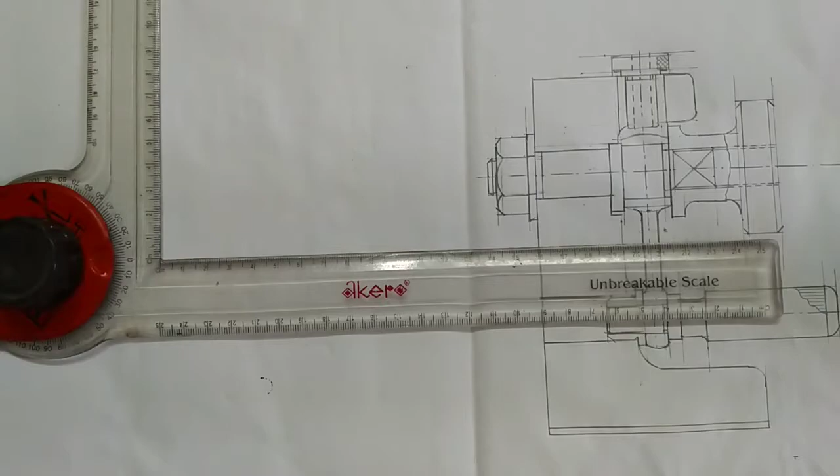Next step, I am going to draw the side view of part number 1 stand.

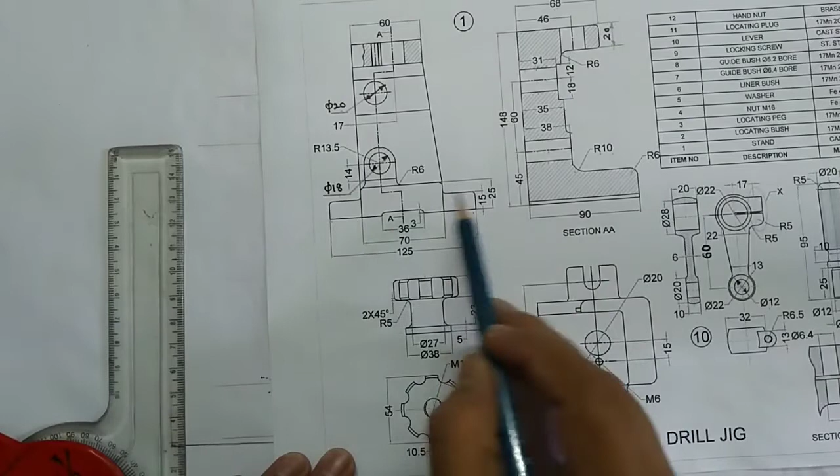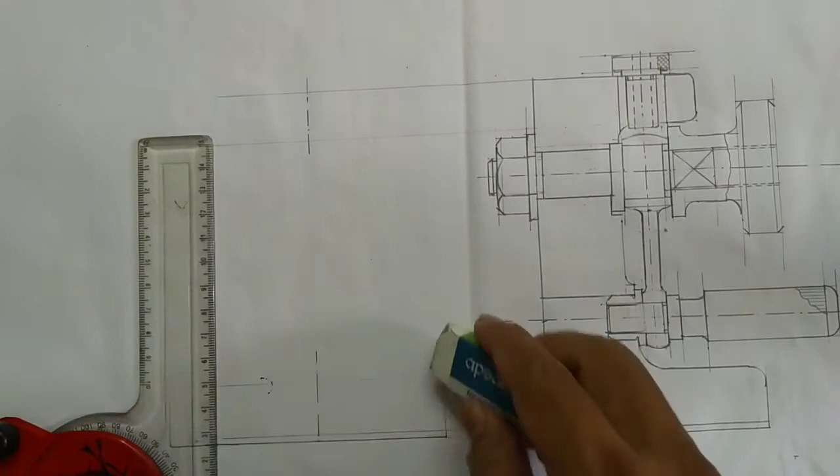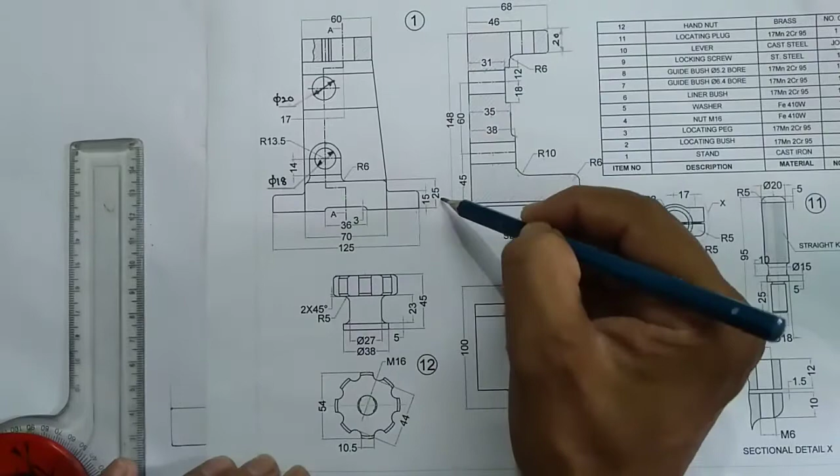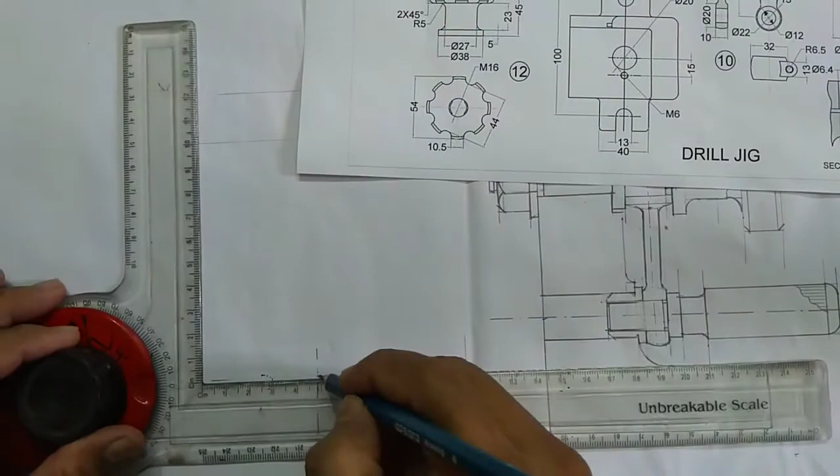Thickness of this flange is 15 mm. A mistake, I have drawn line from 115. I have to draw line from 125 from here. Mark 15 mm from the base. Then this portion thickness was 25 mm. This distance is 70. So I split 35.

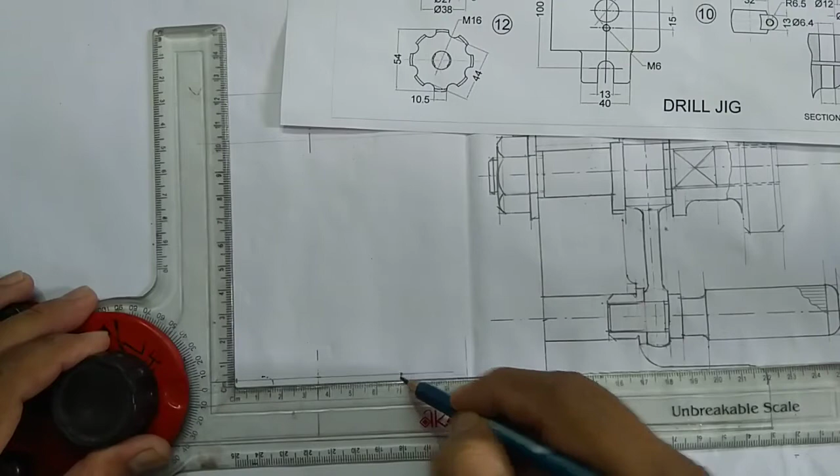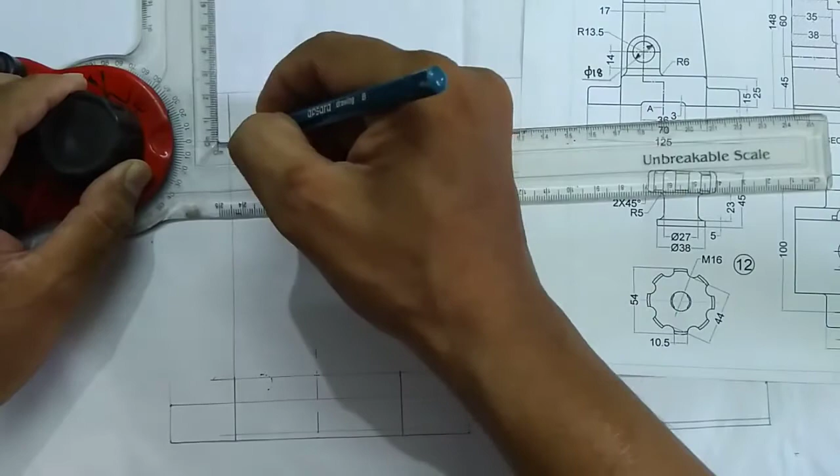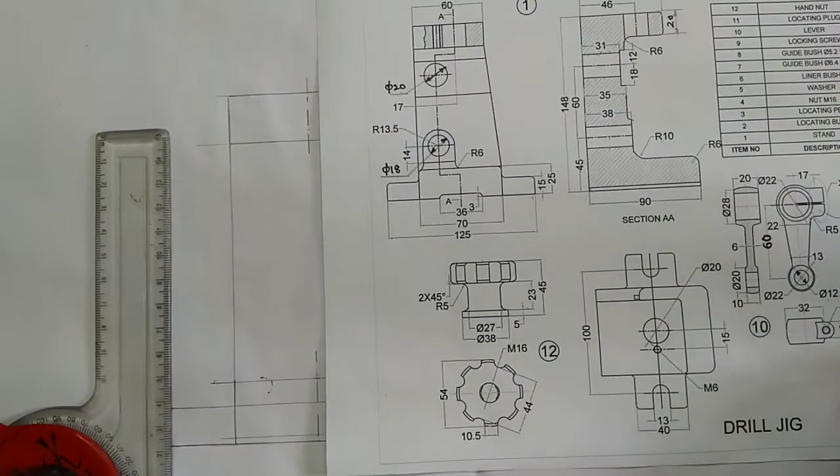Extend the line. This distance was given 60 mm. Then I have to draw this slant line. For that, use ruler and join these 2 points. Next step, we have to draw this center line. This center line has an offset distance of 17 mm.

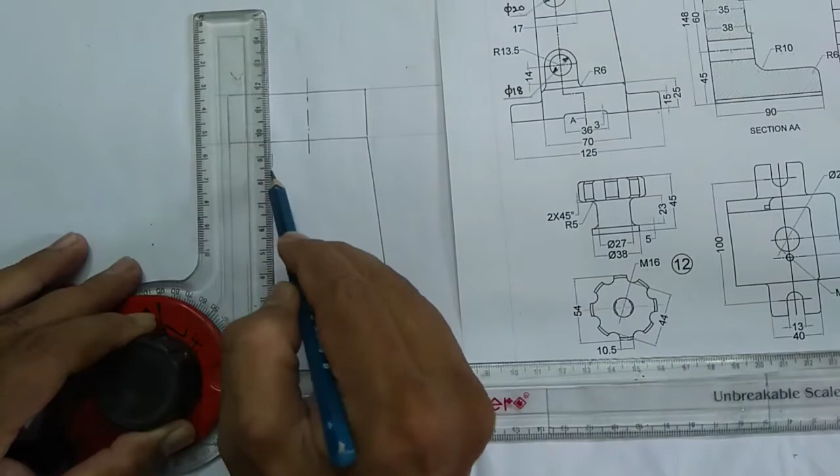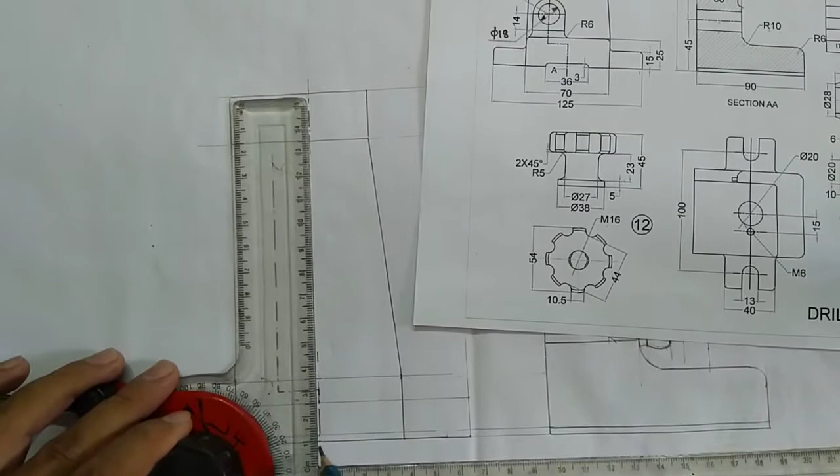So I am measuring 17 mm. I'm marking a point. With that point I'm drawing another center line. Here I am going to use offset section, so I'm bending this section line here. So of that, the offset distance was 17 mm. Next,

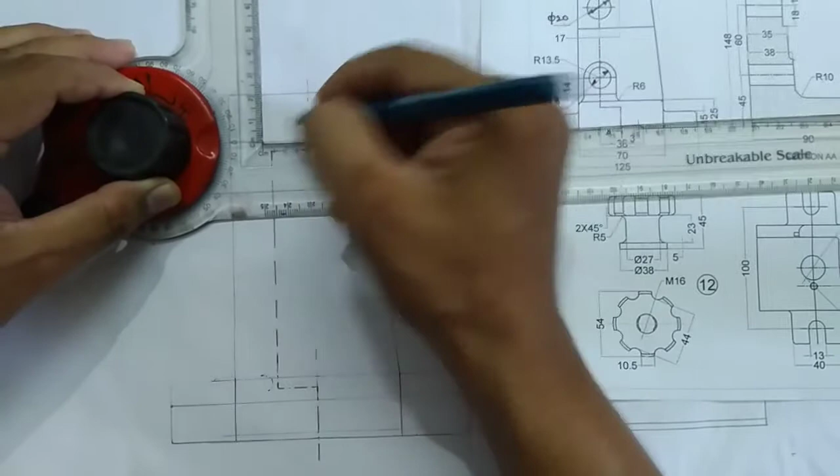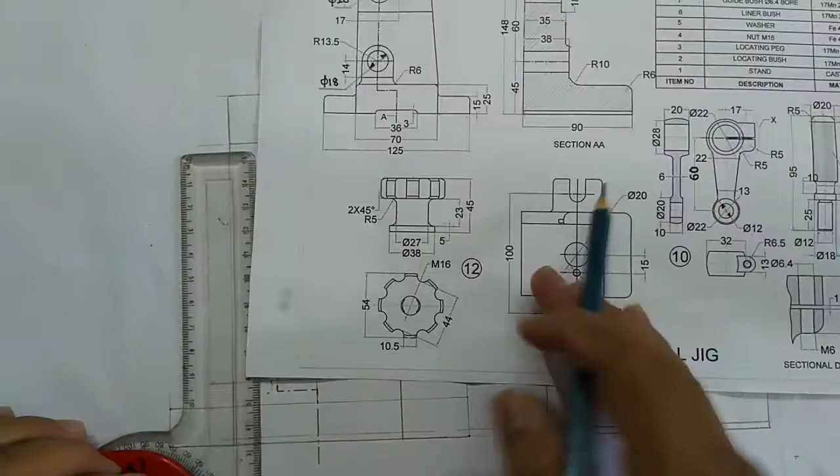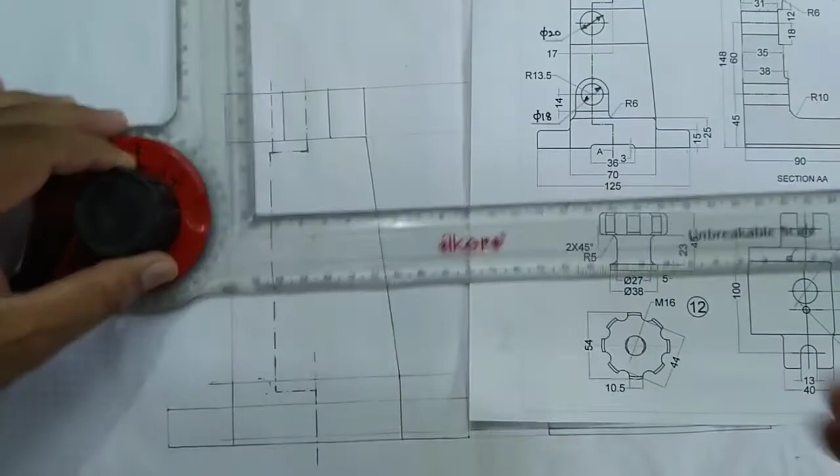There is a hole here. The hole diameter was given on the top view 20 mm. You can see another threaded hole here. That hole diameter was given on the top view M6, and also the distance between these two centers of the hole is 15 mm. So I'm marking 15 mm, 5, 10, 15 here. So M6 means we can split into 3 mm.

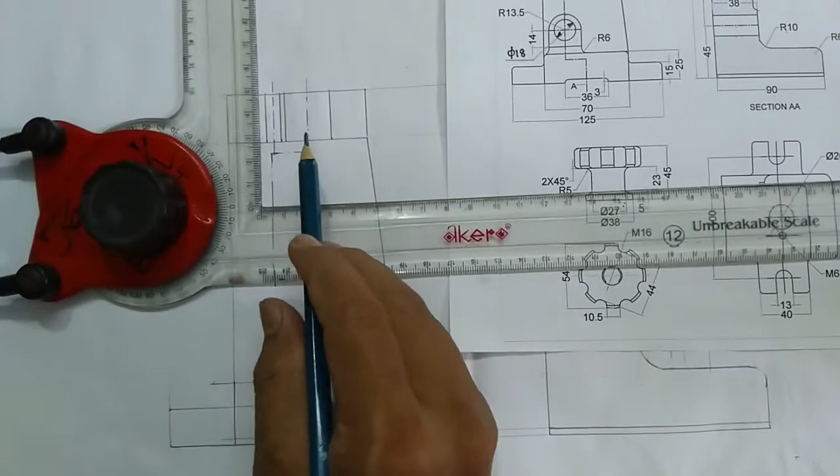As this one is a threaded hole, I have to draw two lines to indicate that this one is a thread. I am leaving just 0.5 mm gap.

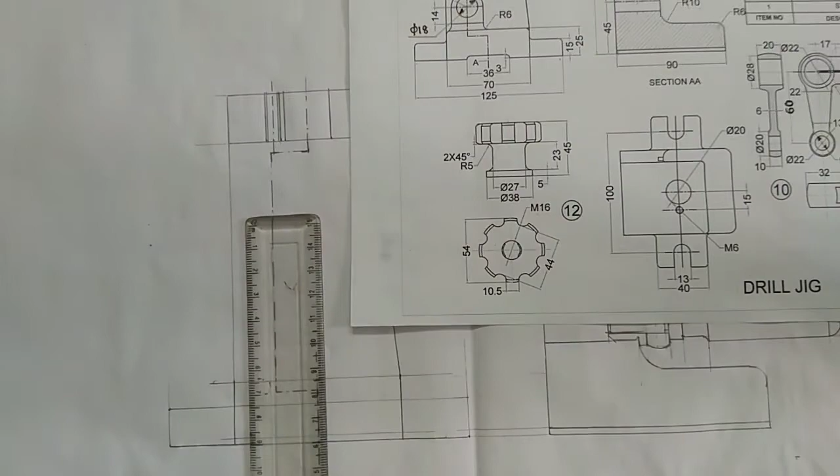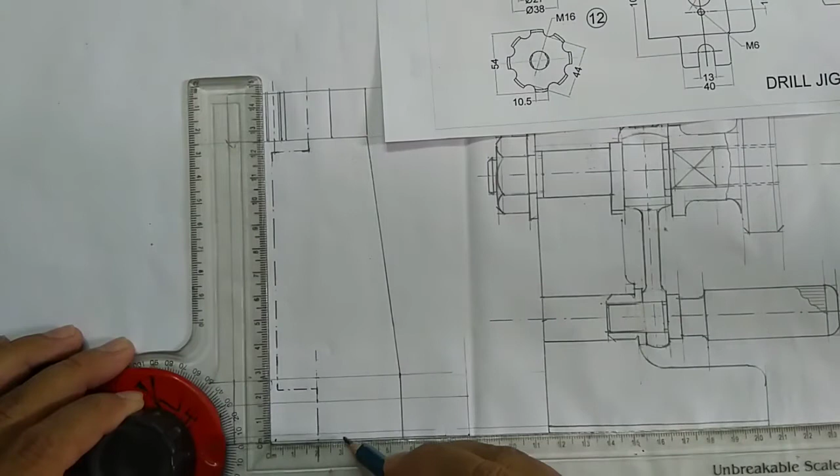Next thing, here you can see a small cut. The height is 3 mm and the width is 36 mm. Half of 36 is 18. 10, 15, 18 and 10, 15, 18. Here the corners are filleted. As this height is 3 mm, use 6 mm diameter hole to fillet the corners.

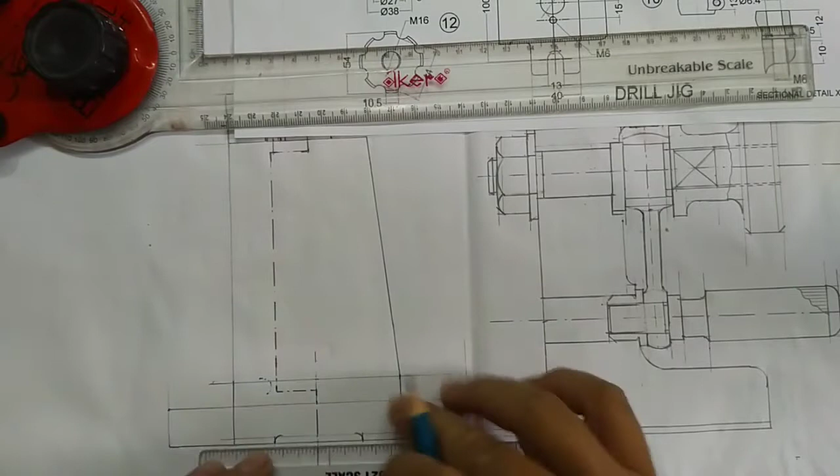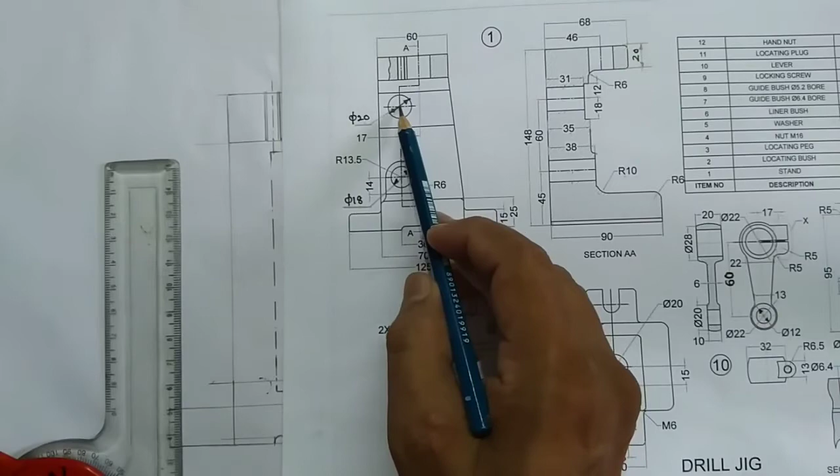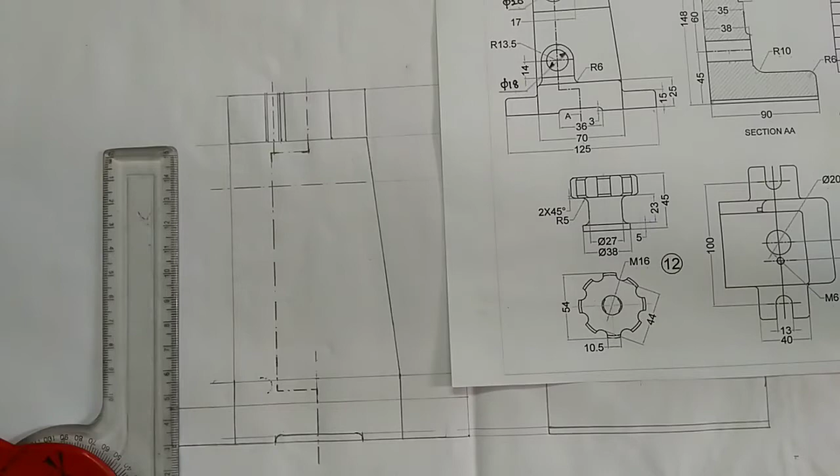Next thing, we shall draw this hole. Before that, we have to mark the center point. We can project that center point from the front view. The hole diameter is 20 mm. Here I am using the pro circle to draw the 20 mm diameter hole. So this one is a circle of diameter 20 mm.

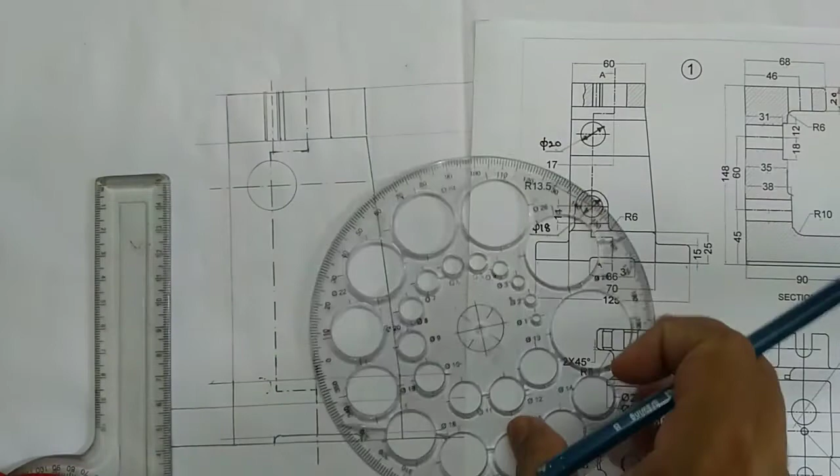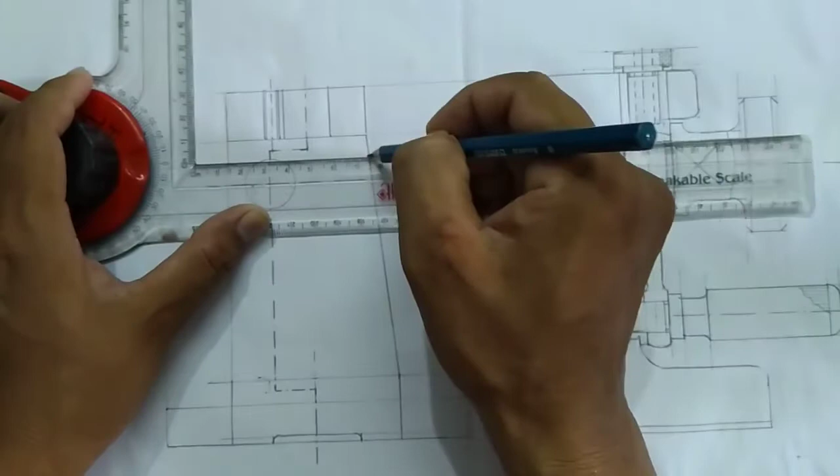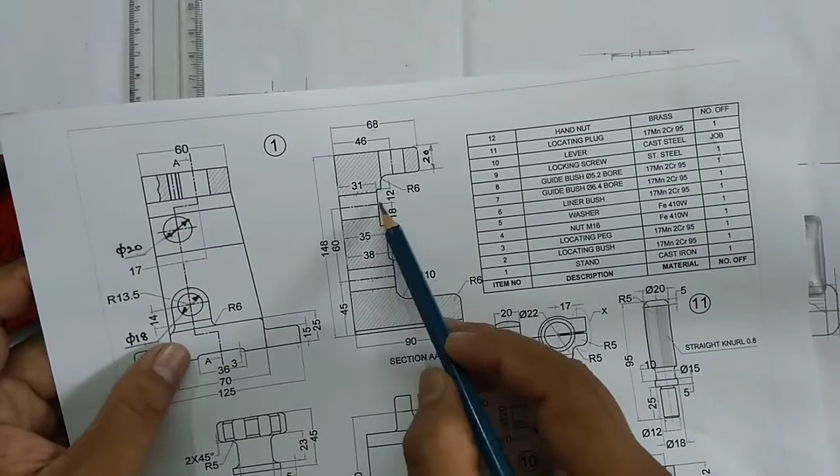Next thing, I have to draw these two lines; that one also we can project from the front view. From this corner I am projecting that line, and from this point, which is 18 mm below from this center line. You can see in the front it was given this distance is 12 mm, which means this distance is 12 mm and this distance is 18 mm. So this line is 18 mm below the center line.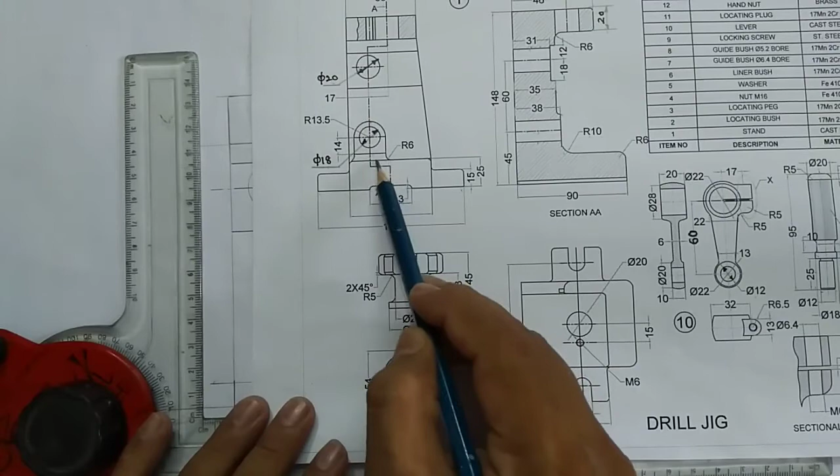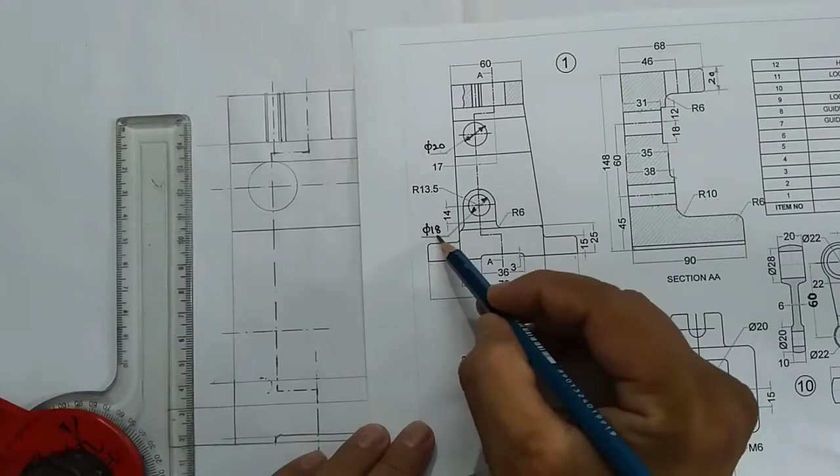And the next one I am going to draw this. Before that I have to mark the center point, which is 14 mm from this line, and this line is 6 mm from the base. So total you will get 20 mm. Otherwise we can project it from the front view. So I am directly projecting the center point from the front view. The hole diameter is 18 mm. So this one is the 18 mm diameter hole.

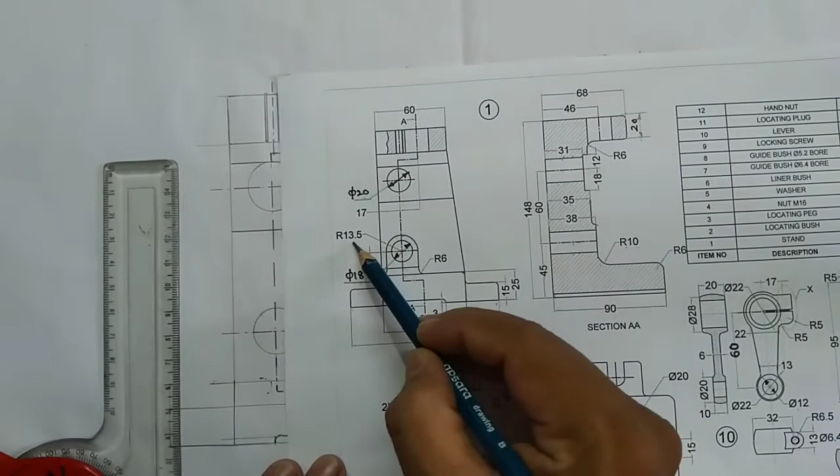Then this semicircle radius was 13.5. Use compass and measure 13.5. Measuring 13 and 14. Between 13 and 14 I am keeping the pencil. I am drawing the semicircle.

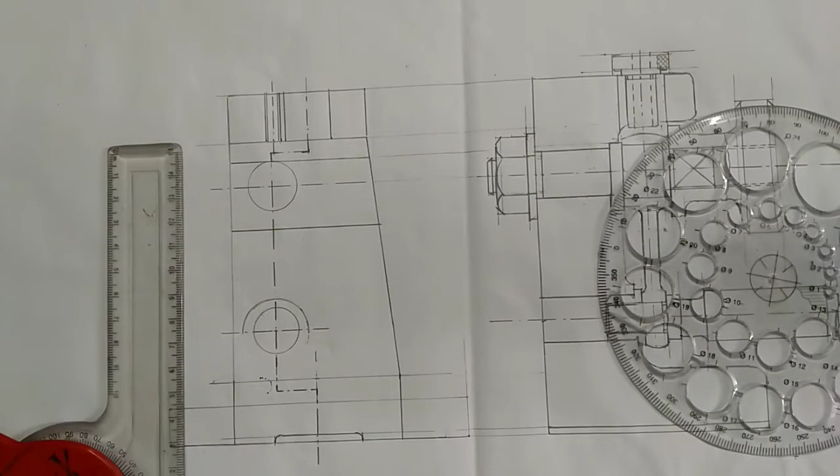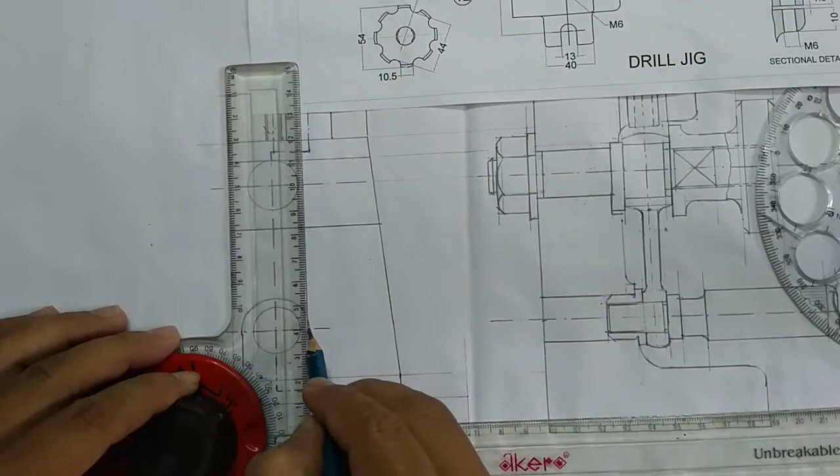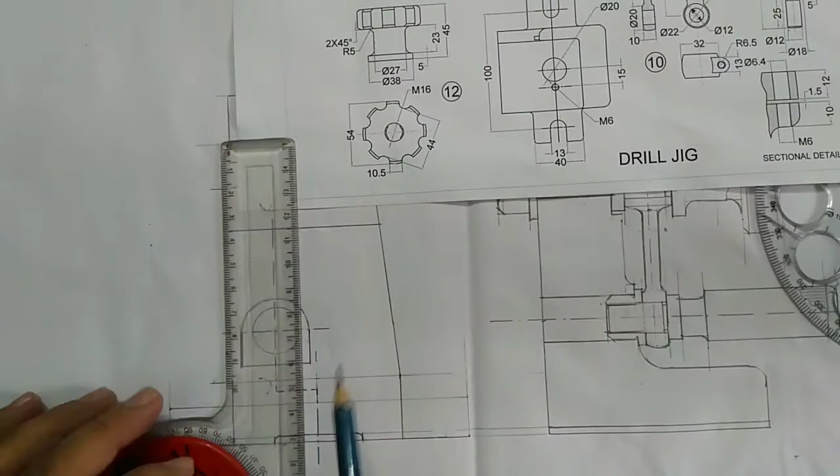Then draw the vertical line of 14 mm length. So this distance is 14 mm, and also from here. Then join this line. You can see here the fillet of radius 6 mm. So use a 12 mm diameter circle.

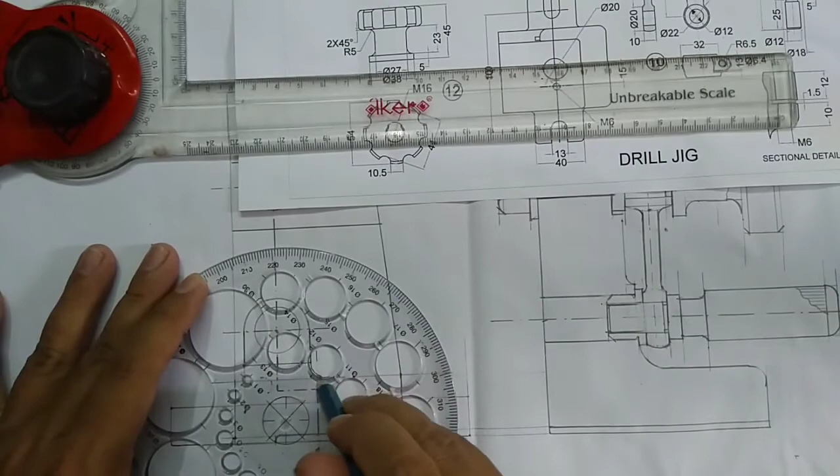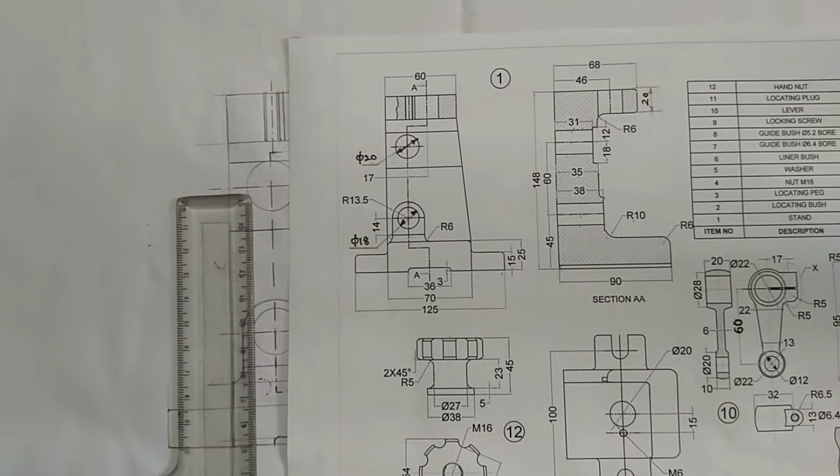Okay, that's all. We have completed the side view. Then we have to assemble some parts. In this hole we have to fix part number 6, liner bush. You can see here part number 6, this will be placed here.

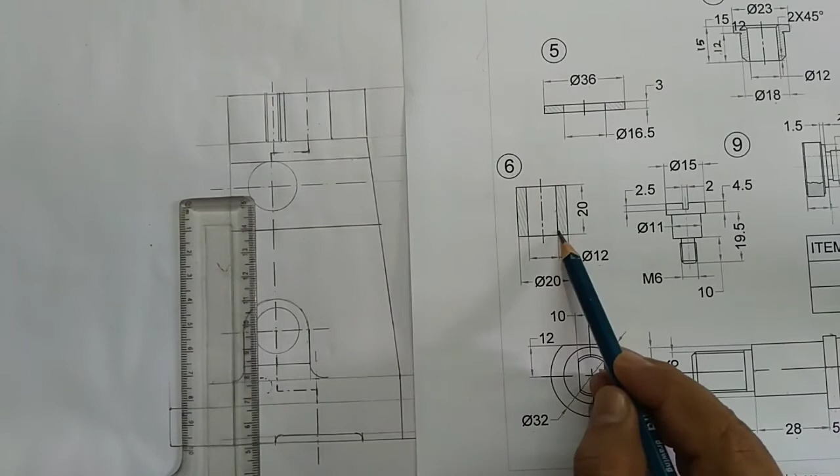So already we have drawn this 20 mm line. This height is 20 mm, so this height is also 20 mm, so it will correctly match here. I have to draw these two lines only, which is 12 mm. The gap between these two lines is 12 mm. You mark 6 mm, and in this side 6 mm.

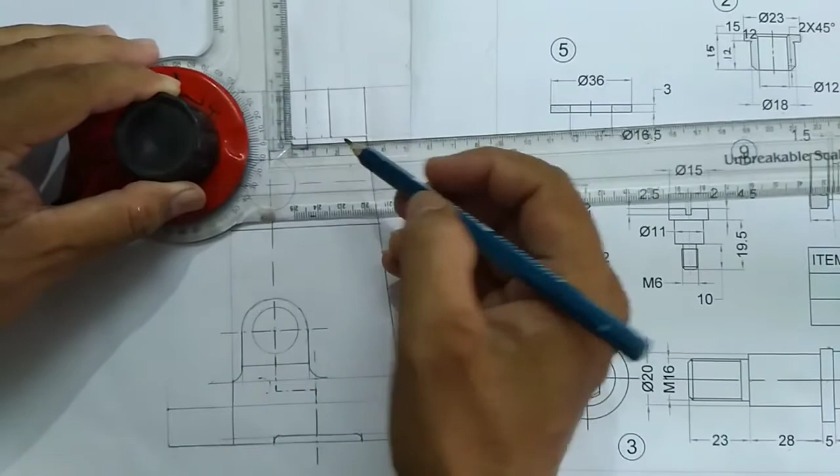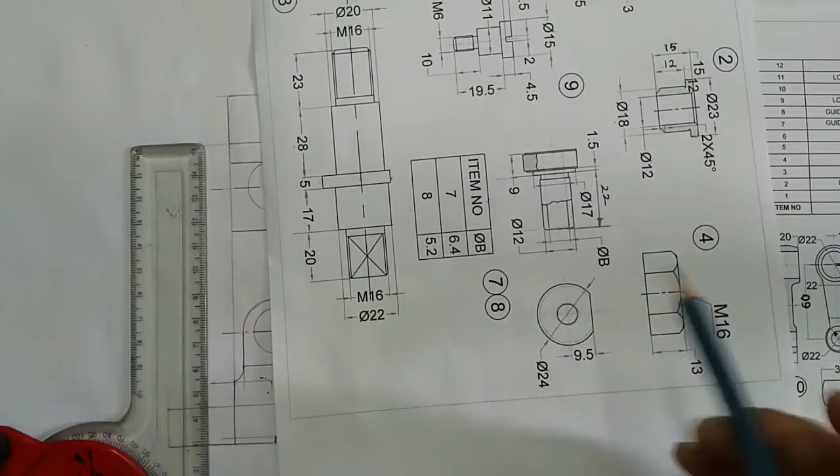Next we have to assemble this part number 7 and 8 here. So already we have drawn this 12 mm line. This gap is 12 mm. So we have to insert this portion here. Also I have to draw the mirror image of this diagram, because this end will come here.

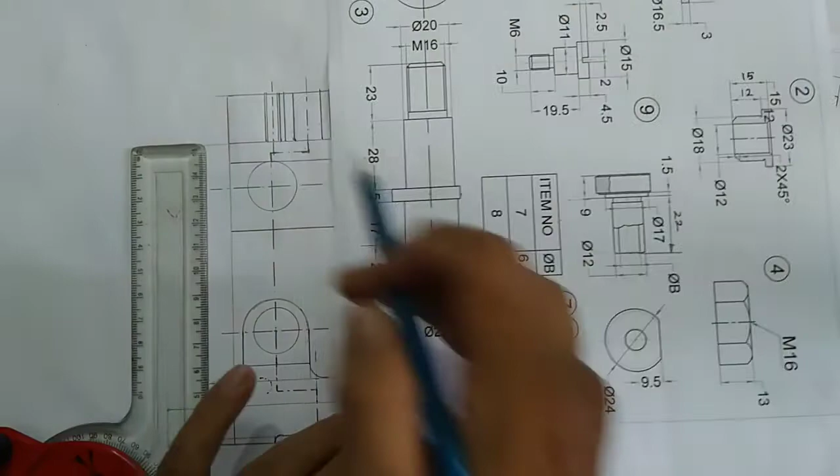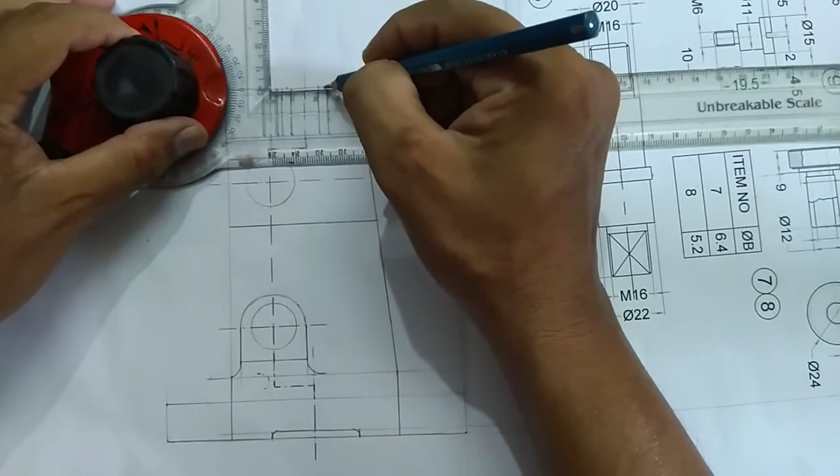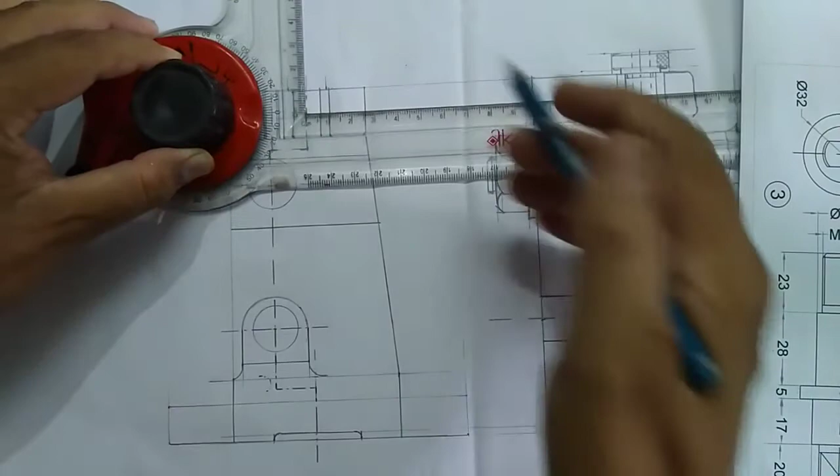17, half of 17 is 8.5. So this distance is 17, and the overall thickness is 9. So from here you mark 9 mm and draw a rough line.

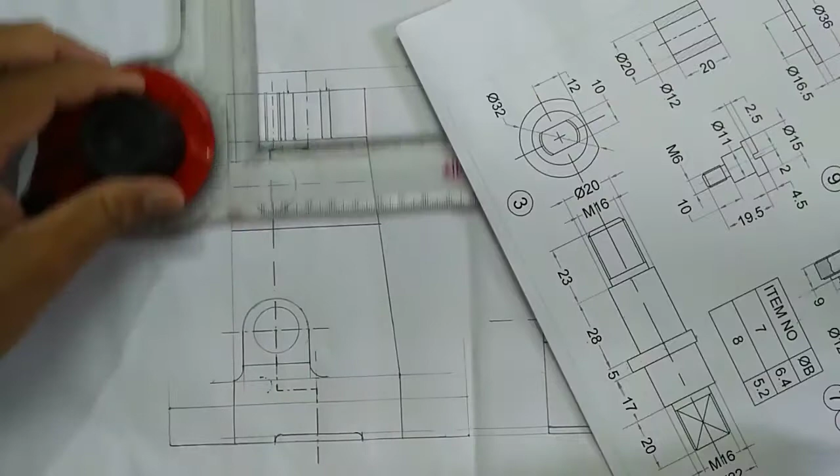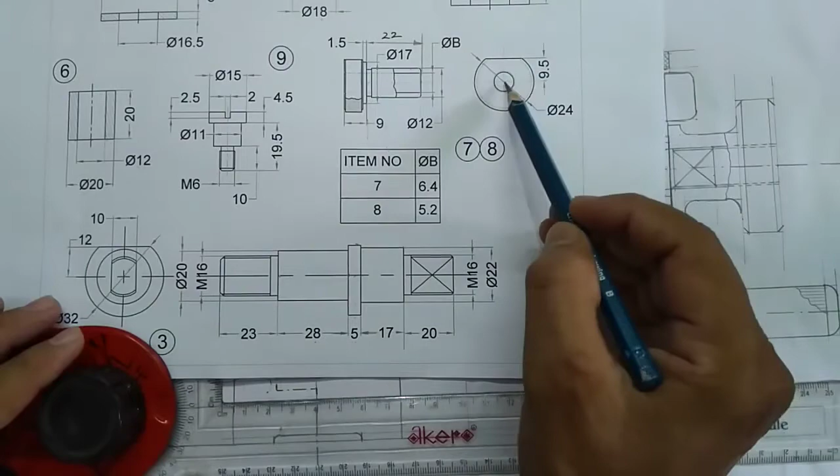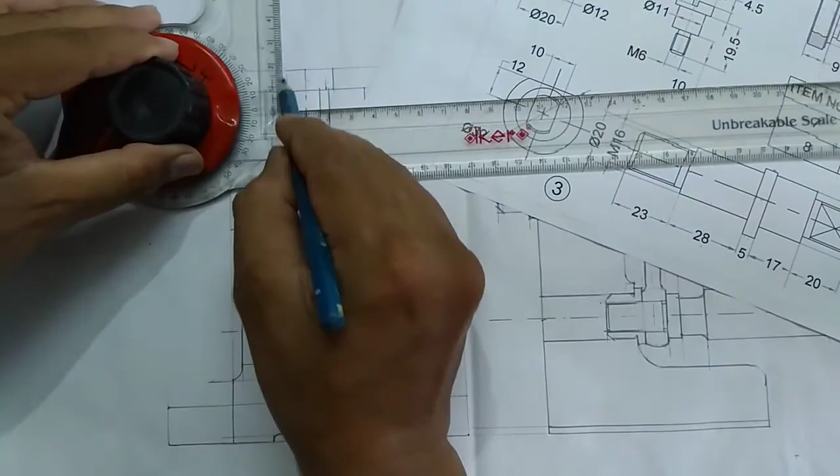And the diameter was given 24 mm, which means from center to this distance is 12 mm. 10, 11, 12. So this distance is 12 mm. Sorry, I have to erase this line. And this distance was given 9.5. So you mark a point in between 9 and 10. And this gap distance is 1.5.

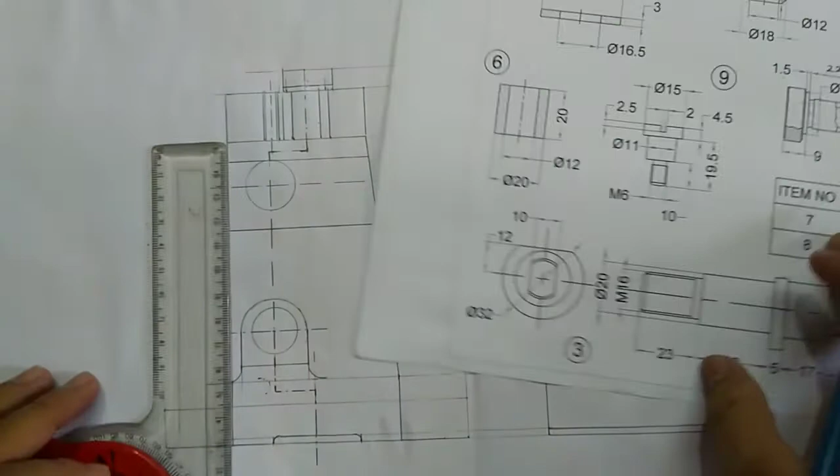Also here you can see a knurled portion.

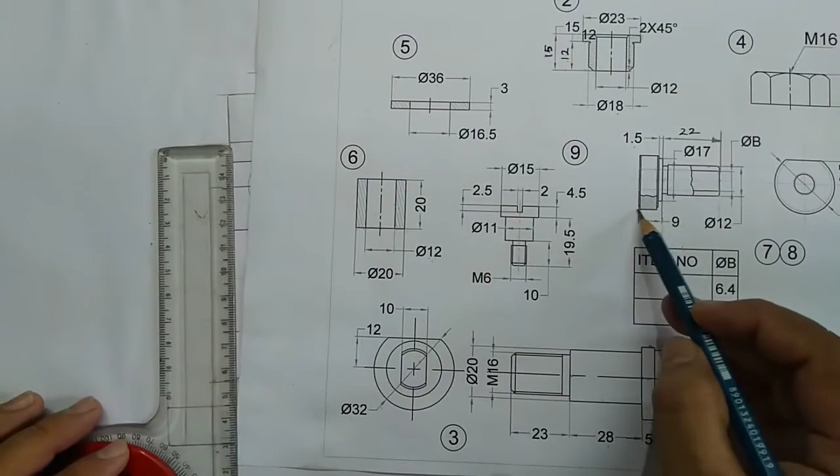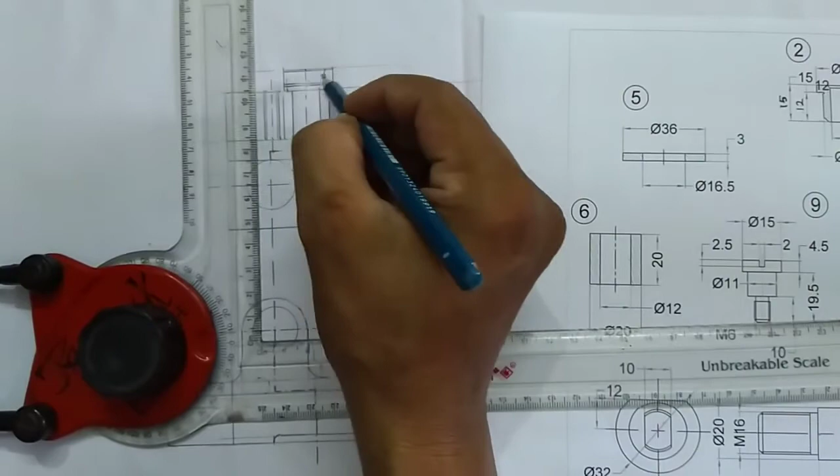I'm going to show that knurling here, but before that you can see small chamfered lines here. So in the corner chamfer has been done. So you will get another 2 lines very close. I'm going to use just 0.5 mm. The gap between these 2 lines I'm going to keep 0.5 mm. So in this portion I have to show the knurled lines. So for that, turn your drafter to 45 degrees.